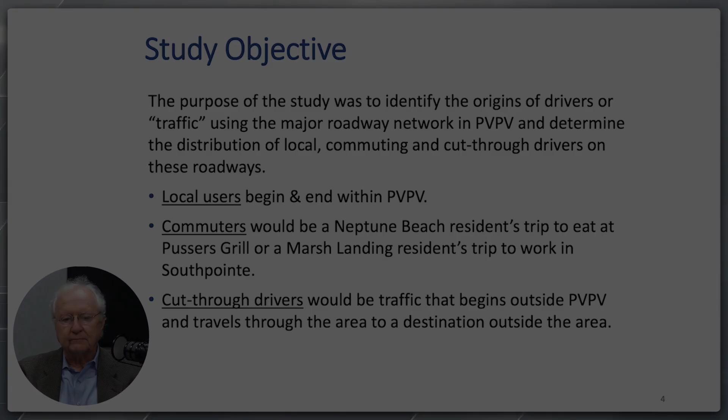The key findings, I'm going to share this with you early in the presentation, and then I'll share more detail on these findings as we get to the end. The data shows that our roadways are primarily occupied by local and commuter users.

And what that basically tells you is that it is all of Ponte Vedra Palm Valley residents who are the source of most of the traffic, whether that means it's their driving within the community, they're driving to locations outside the community and returning, or their service providers, employees of businesses located in Ponte Vedra and Palm Valley, who live outside of the area, who commute into Ponte Vedra and Palm Valley.

Local user volumes are highest on roadways in the central portion of the study area, and I'll be showing you some detail in just a moment that will help illustrate that point.

Commuter volume, not surprisingly, is highest on the perimeter roadways. You'll see that especially at the Palm Valley Bridge. Again, we'll be looking at the detail in just a moment.

And the other key finding, important to recognize, is that the average annual daily traffic volumes on A1A north of Solana Road to JTB are currently well over the design capacity of the roadway. Design capacity really means what in theory is the maximum service volume for that roadway.

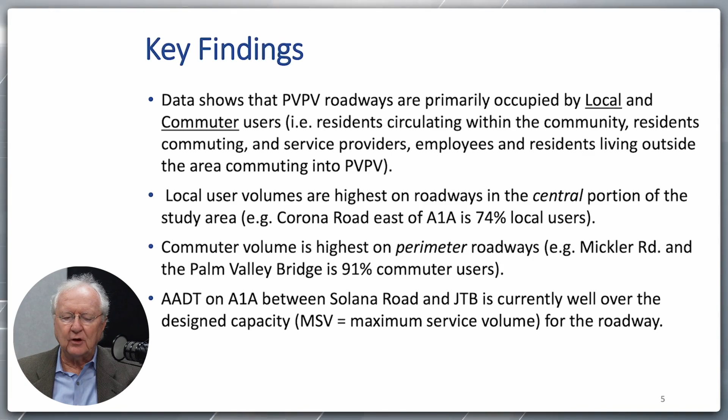The first slide that shows detail shows you traffic composition at the Palm Valley Bridge, along Palm Valley Road, and along Mickler Road. Please note the color key at the top of the slide. It tells you what kind of traffic composition we're looking at.

The majority of that traffic, as you can see, is commuter traffic. A relatively small portion is commuter traffic that originates in Nocatee and returns to Nocatee. And an even smaller sliver, shown in purple, is the cut-through traffic from Nocatee. In fact, there are only 860 trips on average every day through the year that originate and are not destined to stop in Ponte Vedra, Palm Valley, but use that community as a drive-through area.

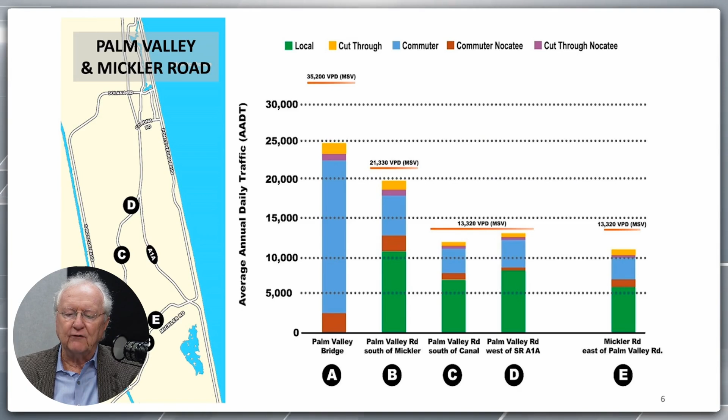The rest of the traffic is all generated by either residents within Ponte Vedra Beach and Palm Valley or commuters who are providing services or work in the Ponte Vedra, Palm Valley area. The breakdown beyond that first bar on the left is merely segments of Palm Valley Road, moving from left to right, and then lastly, the segmentation of the stretch of Mickler Road from Palm Valley Road to A1A.

The next slide breaks out first Ponte Vedra Boulevard, and then Roscoe Boulevard. They have very different traffic characteristics, as you can see. You'll note that Ponte Vedra Boulevard, no matter what stretch of the road you're looking at, is almost entirely made up of local traffic.

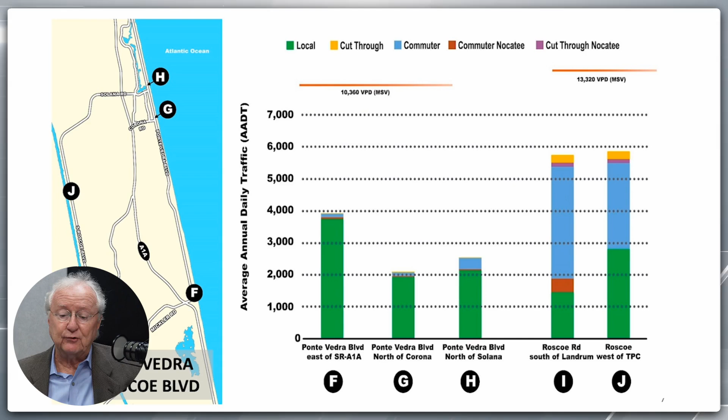People that live within the old Ponte Vedra Beach area and are shopping locally and returning to their homes. If you go to Roscoe Boulevard, you're looking at a different situation, because Roscoe is one of those roads that gets used by commuter traffic, people originating in Ponte Vedra, Palm Valley, who are going to school at Ponte Vedra High School or headed points west of the bridge, or people coming from west of the bridge to provide services in the Ponte Vedra, Palm Valley community.

The next slide shows us Solana Road, which at least on the point of origination on the west side is the north end of Roscoe Boulevard, from there to A1A. This is an area that has lately seen a great deal of traffic congestion during high volume traffic times, with commuters going to work and with services coming into the area. You can see the breakdown on Solana Road is made up almost 100% of those two types of users.

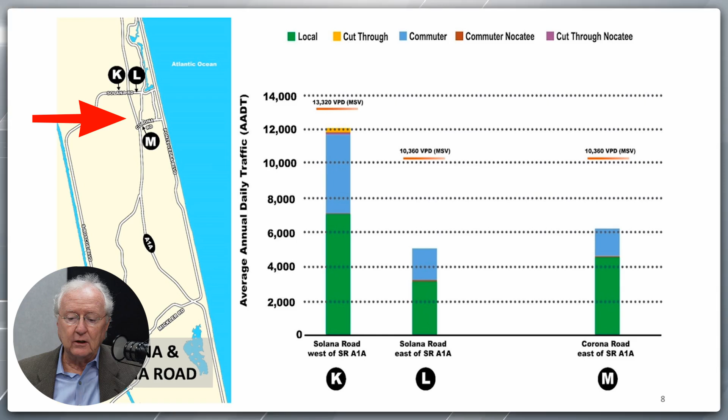And then you can see to the right, Corona Road, and how that is again largely local users with a smaller number of commuter traffic.

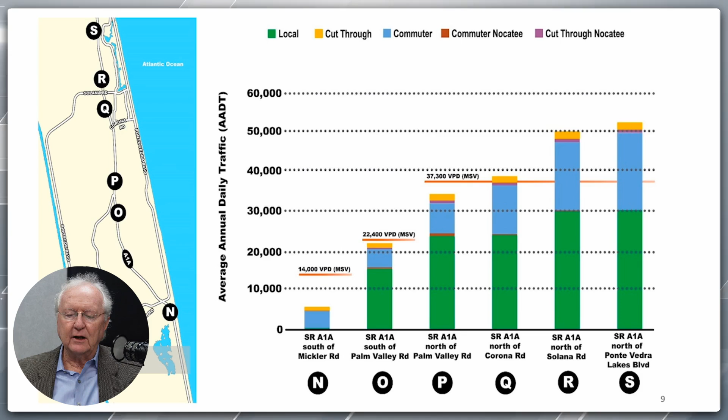The next slide is going to show you a build of traffic along State Road A1A, which is, of course, the primary corridor through Ponte Vedra Beach. Moving from left to right, you can see how the composition of traffic builds, beginning first at Mickler Road, moving all the way to the right on that last stretch along A1A in our community between Ponte Vedra Lakes Boulevard and J. Turner Butler Boulevard.

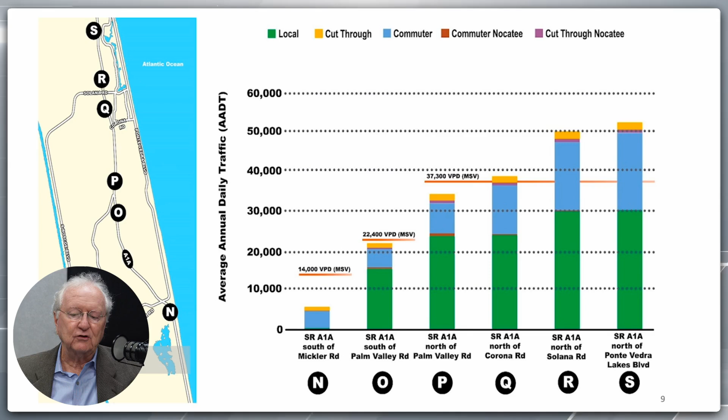One thing I want to call out here is the northern boundary for this study is not the St. Johns County line. It is just north of J. Turner Butler Boulevard. So all of the shopping that is available just south of JTB accounts for some of what you see here as local traffic in that stretch between Ponte Vedra Lakes Boulevard and JTB.

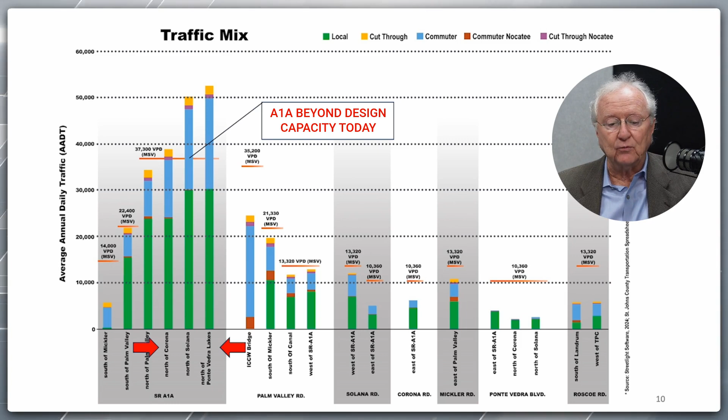This slide shows all of the incremental elements we've been looking at to this point, and it highlights a point I made early on when we discussed findings from this study, that A1A is beyond its design capacity. That's a reality we have to contend with as we look at improvements possible for the coming years.

Now let's take a look again at the key findings of this study. The data you've seen shows that Ponte Vedra Palm Valley roadways are primarily occupied by local and commuter users. The local users make up anywhere from 50 to 70% of the volume on various Ponte Vedra Palm Valley roads.

Commuters are a very important contributor to our traffic issues, and they fall into four groups. It's either Ponte Vedra Palm Valley residents who leave our area and return on various errands, or it can be residents who live outside of Ponte Vedra Palm Valley who commute into our community for various services or social needs and then leave our area.

It can be service providers who commute to and from Ponte Vedra and Palm Valley. And lastly, it can be employees of businesses and schools who are commuting to and from Ponte Vedra Palm Valley. Lastly, as we've emphasized a couple of times, A1A between Solana Road and J. Turner Butler Boulevard is currently well over the design capacity of the roadway.

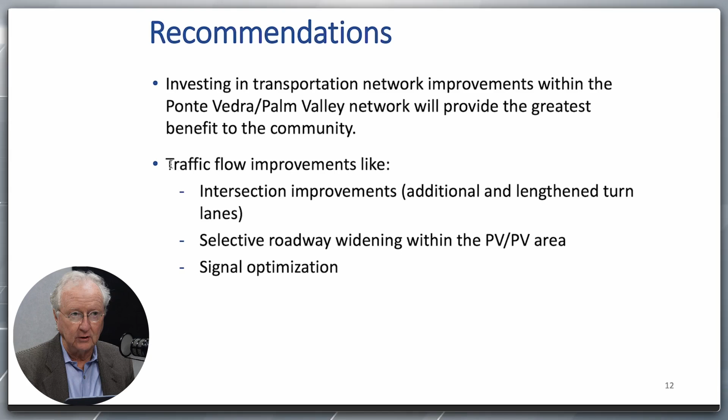The Ponte Vedra Beach Palm Valley Origin Destination Study included several recommendations. Of greatest importance, the study says that the roadway improvements that will provide the most benefit to our community will be investments in our own PVPV transportation network. These improvements would include lengthening and adding additional turn lanes at key intersections, selective roadway widening, and signal optimization.

To that end, based on the past efforts of the Citizens Traffic Task Force and funding provided by our state legislature, the Florida Department of Transportation is currently working to address all the intersection and roadway improvements on this page. The Mickler Road A1A intersection improvement is already under construction and will be completed in early 2025.

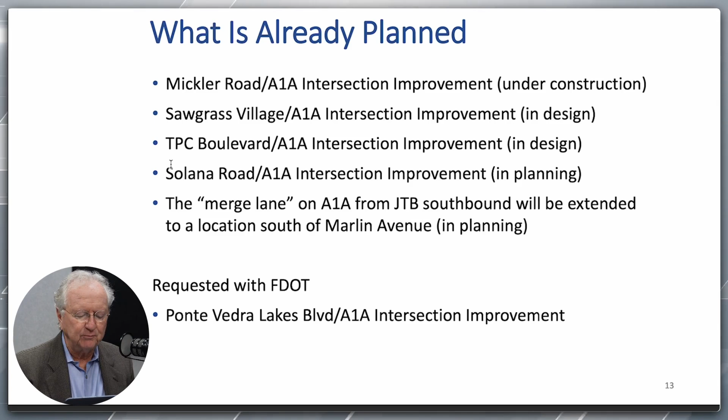In addition, the existing merge lane from JTB southbound on A1A will be extended to a location south of Marlin Avenue. Finally, our organization recently made a formal request to FDOT that an improvement to the Ponte Vedra Lakes Boulevard A1A intersection be added to the work plan.

In closing, the Citizens Traffic Task Force would like to thank the Florida Department of Transportation, the North Florida Transportation Planning Organization, and most especially our St. Johns County commissioners and staff for their ongoing support. We also thank you for your interest in this important information.